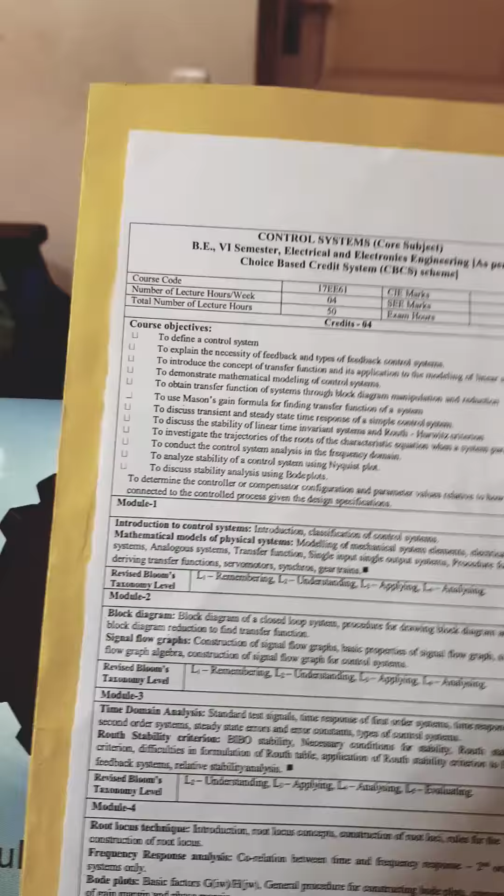Today we are going to start the third module. So module 3, the time domain analysis. Under that we are going to see standard test signals, time response, time response of first order system, time response of second order system, steady state errors and error constants, types of control systems.

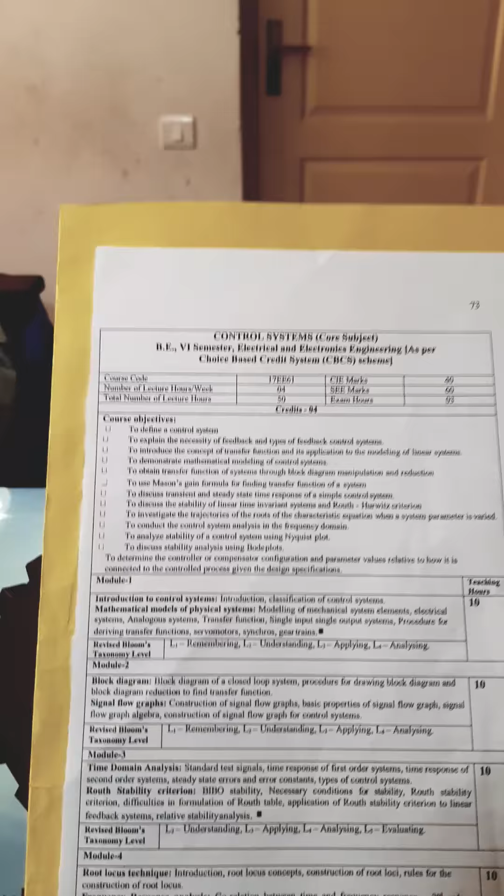So this much portion we are going to study today, and this is not as easy as what we studied before. This is a little difficult. So for all of you, a little concentration is required. A little mathematical ability is required here, and you should know the Laplace transform. That is the basic requirement of module 3. Today we will try to complete the time domain analysis.

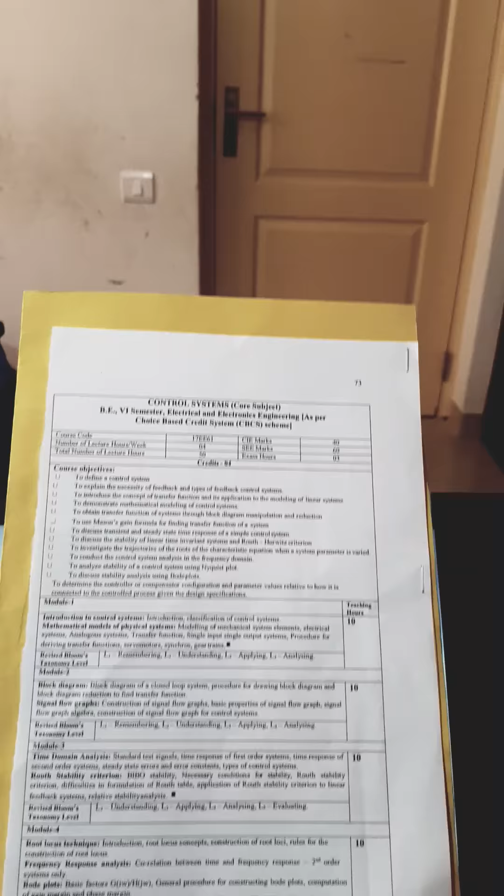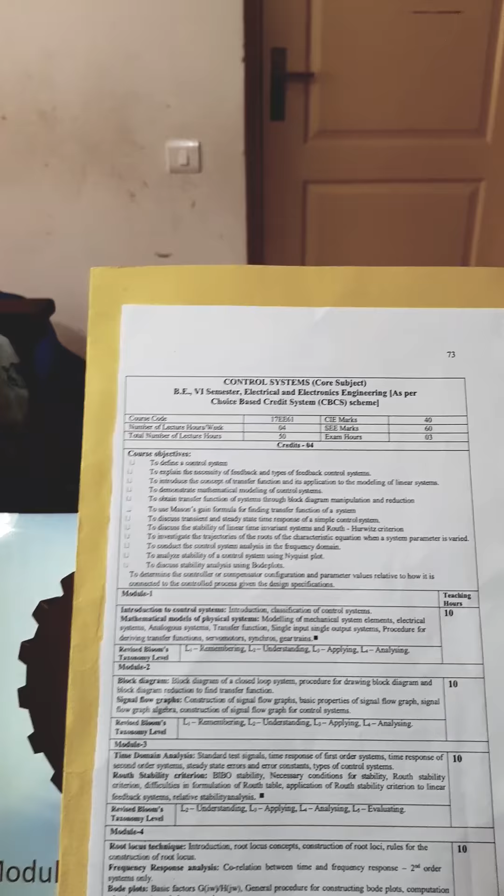So now, compared to the previous, we are going to study little difficult portions. That is the control system module 3. In that, time domain analysis we are going to do. Now the time response.

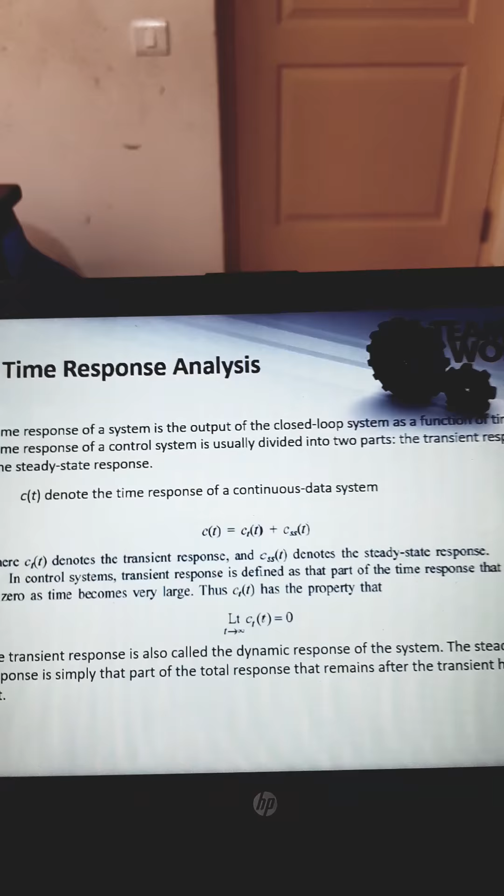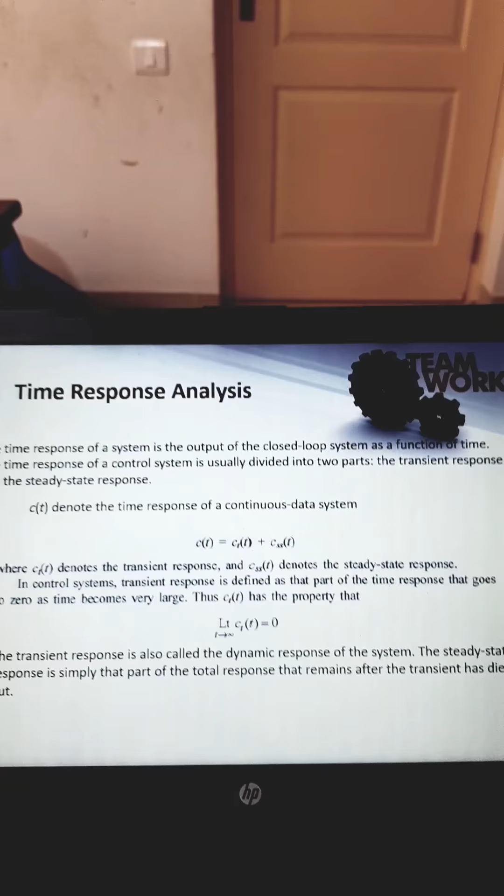So here, what is the definition of the time response? The time response of a system is the output of closed loop system as a function of time. So time response of the control system is usually divided into two parts: the transient response and the steady state response. Time response of the system is the output of closed loop system as a function of time. Usually C of t denotes the time response of the continuous data system.

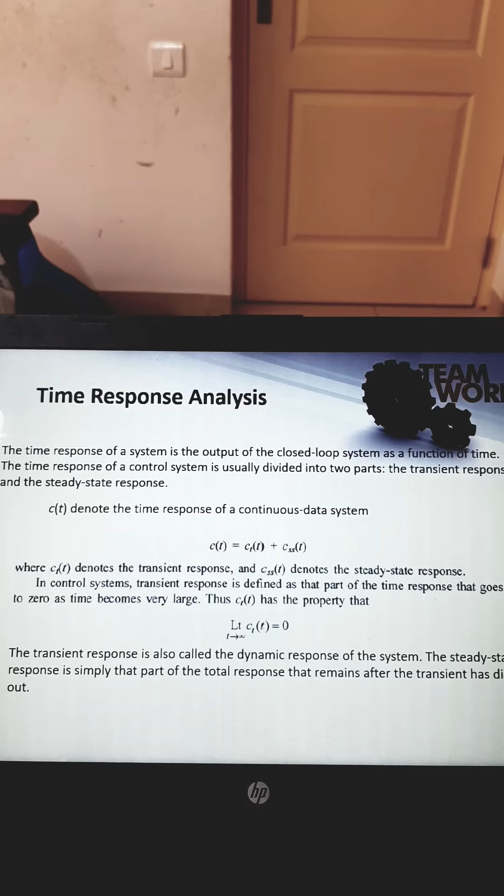C of t is equal to C_t(t) plus C_ss(t), where C suffix t, inside the bracket t, denotes the transient response, and C_ss(t) denotes the steady state response. In control system, the transient response is defined as that part of the time response that goes to zero as time becomes very large.

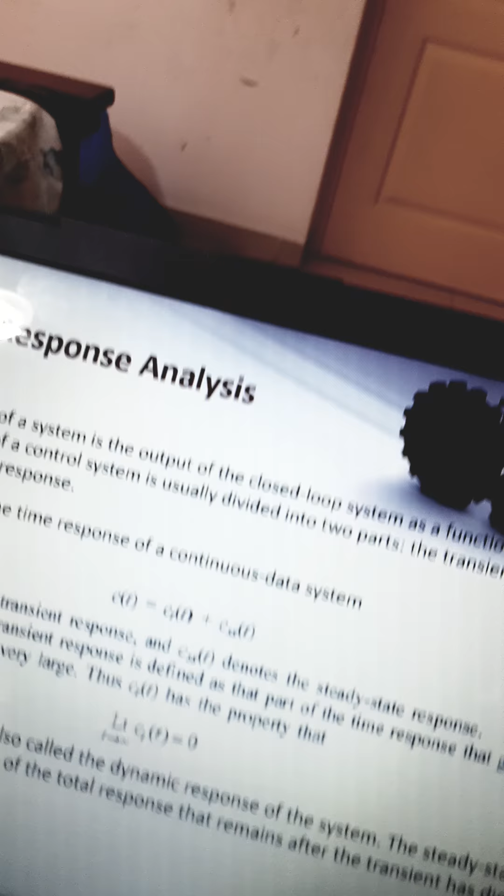Now, thus C_t(t) has the property that limit t tending to infinity of C_t(t) is equal to 0. So just wait for 1 or 2 seconds. Yes.

Now, what is transient response? Transient response is called the dynamic response of the system. Transient response is also called dynamic response of the system. Then what is steady state? Steady state response is simply that part of the total response that remains after the transient has died out. After transient died out, the response that remains is known as steady state response.

Now we will see different standard test signals. So we'll see some of the standard test signals. So the first one is step signals. The step is a signal whose value changes from one level to another level A in 0 time. One level, that is usually 0, to another level, that is A, in 0 time.

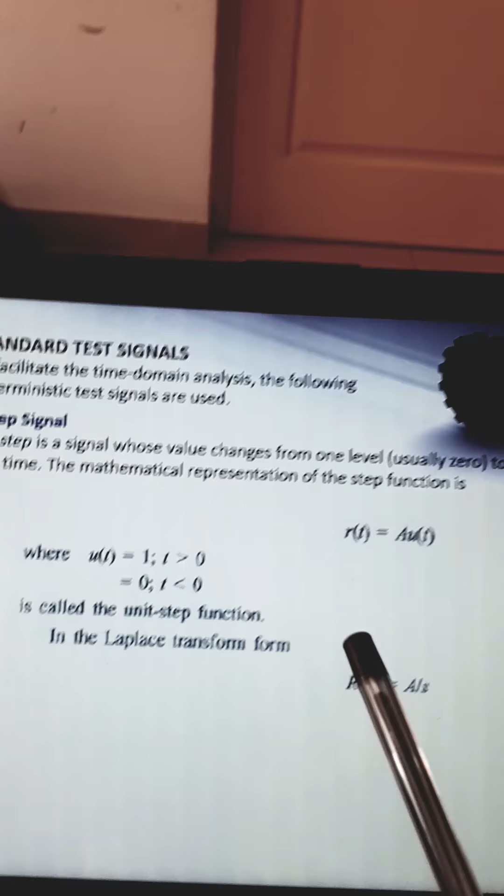The mathematical representation of the step function is R of t is equal to A into U of t, where U of t is equal to 1 for t greater than 0 and equal to 0 for t less than 0. U of t is known as the unit step function. Now when you take the Laplace transform, this becomes R of s is equal to A by s. U of t is represented by 1 by s.

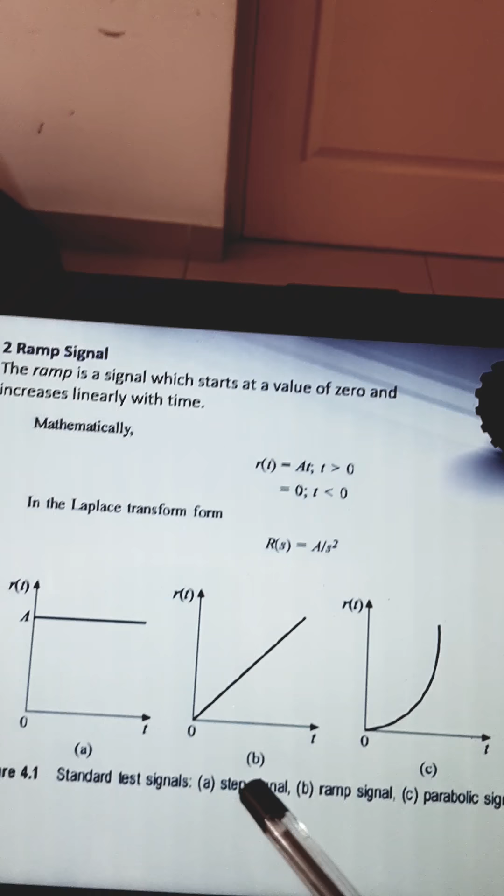Now the second one is the ramp signal. The ramp is a signal which starts at a value of 0 and increases linearly with time, like this. This will be the step. Step means before 0 it is 0, at 0 it becomes A, like that. So the ramp signal is nothing but the signal which starts at a value of 0 and increases linearly with time. So this is the ramp signal.

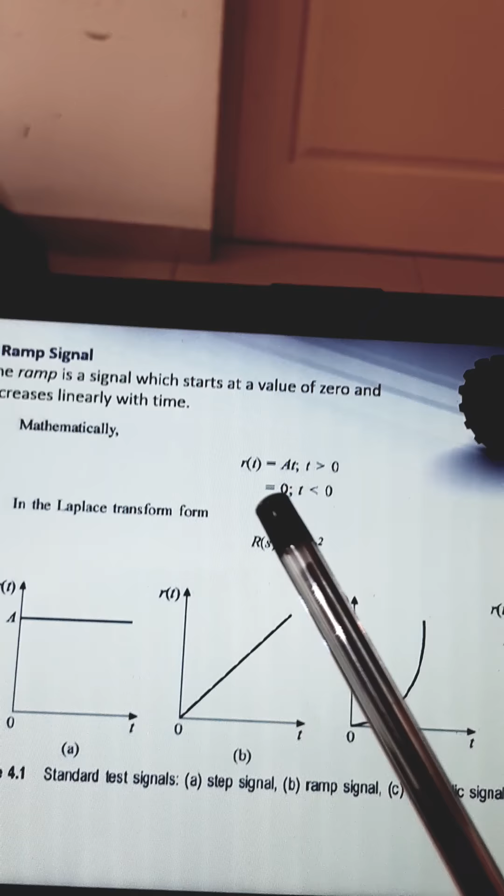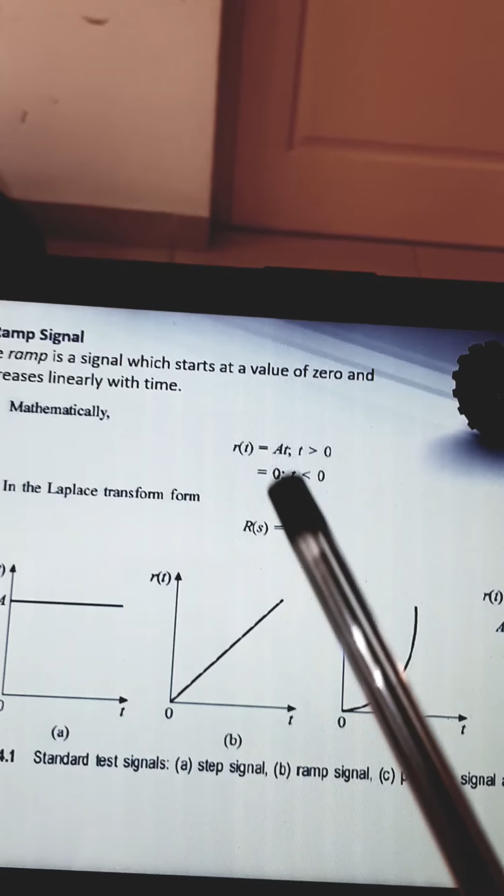Now how can we mathematically represent this? r(t) = At for t greater than 0, and equal to 0 for t less than 0. So when you are taking the Laplace transform, R(s) = A/s². So you should understand: At means A/s². So this is the ramp signal.

Third signal, we are going to study the parabolic signal. The parabolic function represents a signal that is one order faster than the ramp function. The mathematical representation of the signal is r(t) = At²/2 for t greater than 0, and equal to 0 for t less than 0. In the Laplace transform form, you will get R(s) = A/s³. This is the parabolic signal.

Now, impulse signal. What is an impulse signal? A unit impulse is defined as a signal which has a zero value everywhere except at t = 0, where its magnitude is infinite. It is generally called the delta function and has the following property.

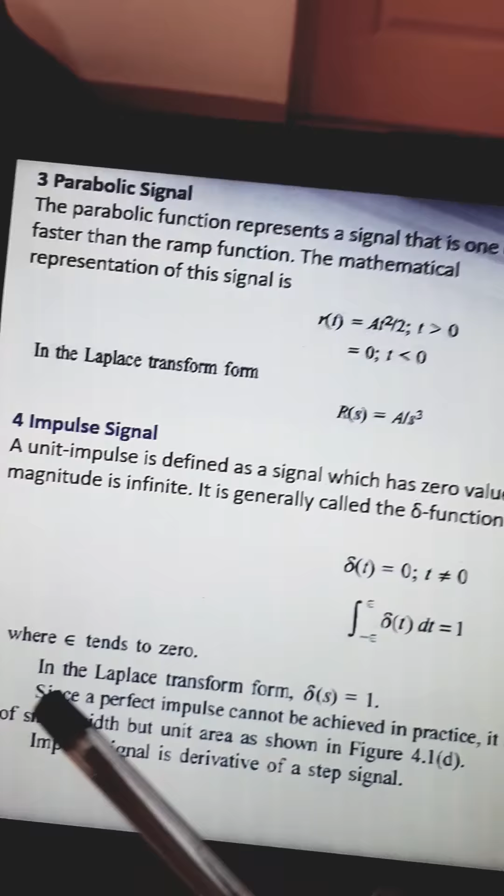δ(t) = 0 for t not equal to 0, and the integration from minus epsilon to epsilon of δ(t) dt is equal to 1, where epsilon tends to 0. So in the Laplace transform, δ(s) = 1.

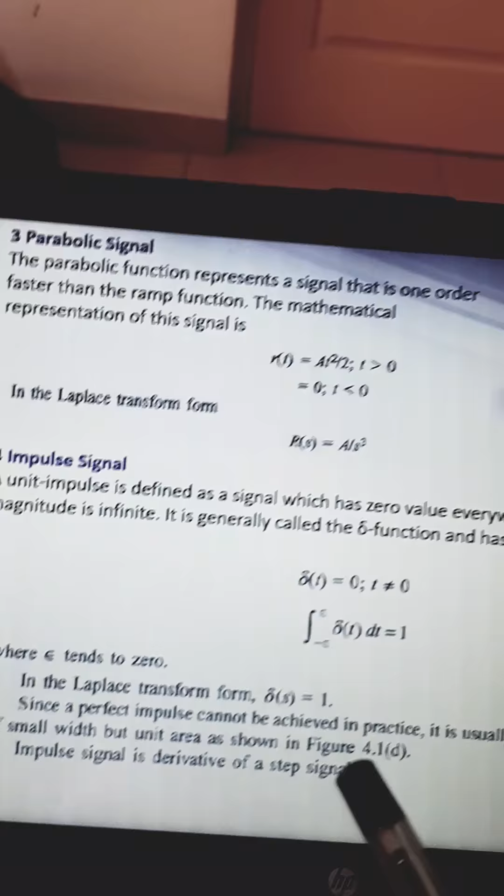Since a perfect impulse cannot be achieved in practice, it is usually approximated by a pulse of small width but unit area, as shown in figure 4.1(d). So the Laplace transform δ(s) = 1, and the integration from minus epsilon to plus epsilon of δ(t) dt is equal to 1.

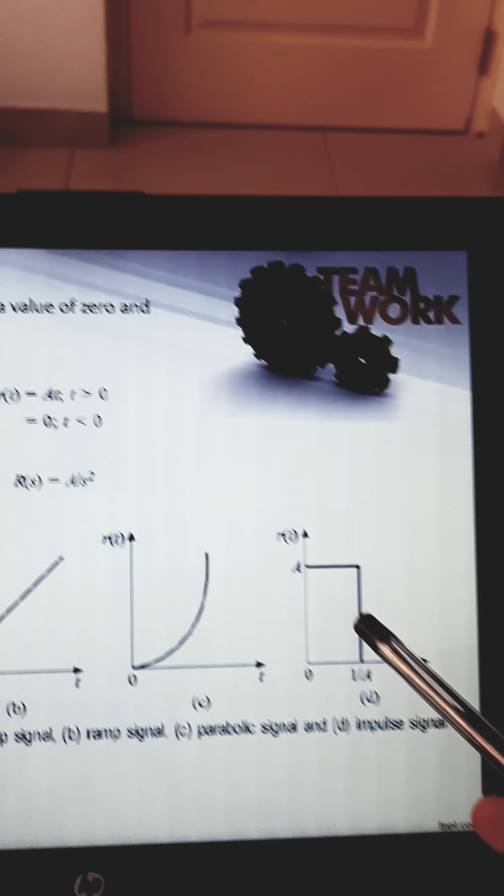So you cannot show an infinite representation at 0. So it is usually represented like this, the impulse signal. It has unit area: A into 1/A, if you multiply, you get 1. And another important thing is the impulse signal is the derivative of the step signal. These are things you are already aware of.

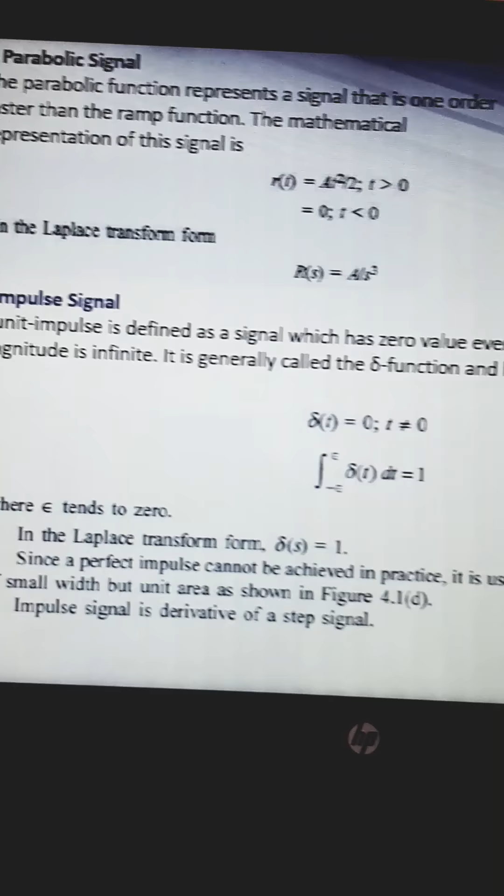So, the impulse response of a system with transfer function C(s)/R(s) = G(s) is given by C(s) = G(s)R(s), and R(s) is 1, so it becomes G(s). So c(t) is the inverse Laplace transform of G(s), that is g(t). Thus the impulse response of a system, indicated by g(t), is the inverse Laplace transform of its transfer function. G(s) is the transfer function.

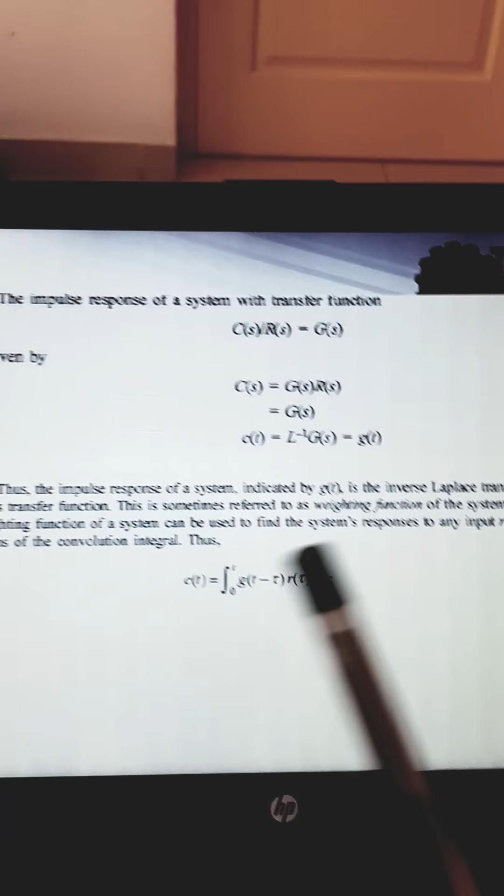So from this example, you can see that C(s) = G(s). The impulse response of a system, indicated by g(t), is the inverse Laplace transform of its transfer function. This is sometimes referred to as the weighting function of the system. The weighting function can be used to find the system response to any input r(t) by means of the convolution integral. Thus, c(t) is the integration from 0 to t of g(t − τ) r(τ) dτ. This is a very important thing.

The weighting function of a system can be used to find the system response to any input r(t) by means of the convolution integral, that is, c(t) is the integration from 0 to t of g(t − τ) r(τ) dτ.

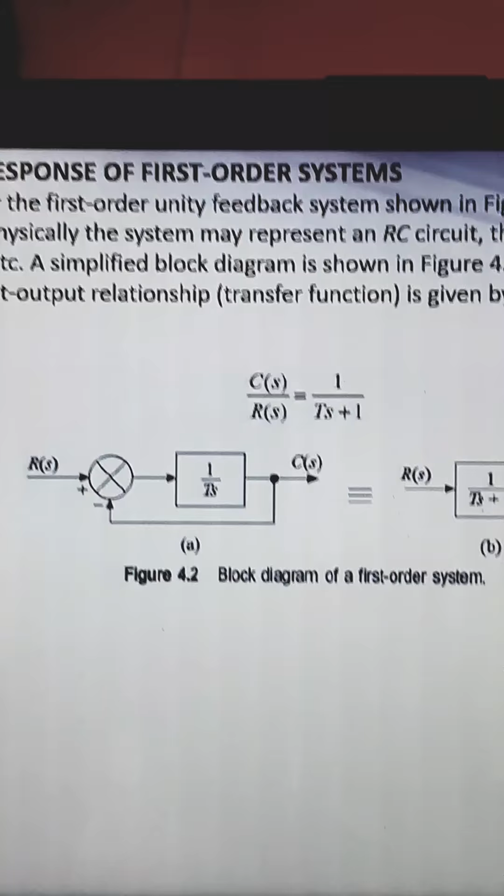Now next we will see the time response of the first order system. First we will see the time response of first order system.

Consider a first order unity feedback system as shown in figure. It's a first order unity feedback. There is no feedback amplification, it is having unity feedback shown in figure. Physically and practically the system may be represented by an RC circuit or thermal system, etc.

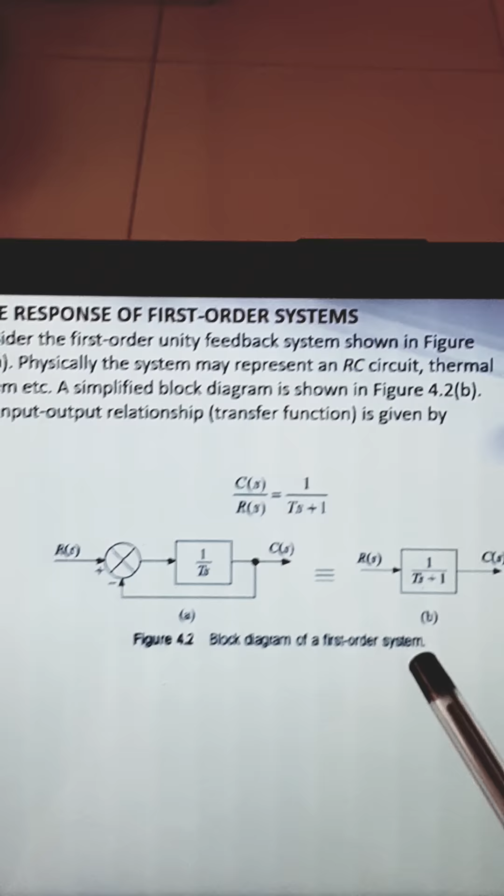A simplified block diagram is shown in figure 4.2b. This is a simplified block diagram. The input output relationship transfer function is given by C of s divided by R of s is equal to 1 by Ts plus 1. 1 minute.

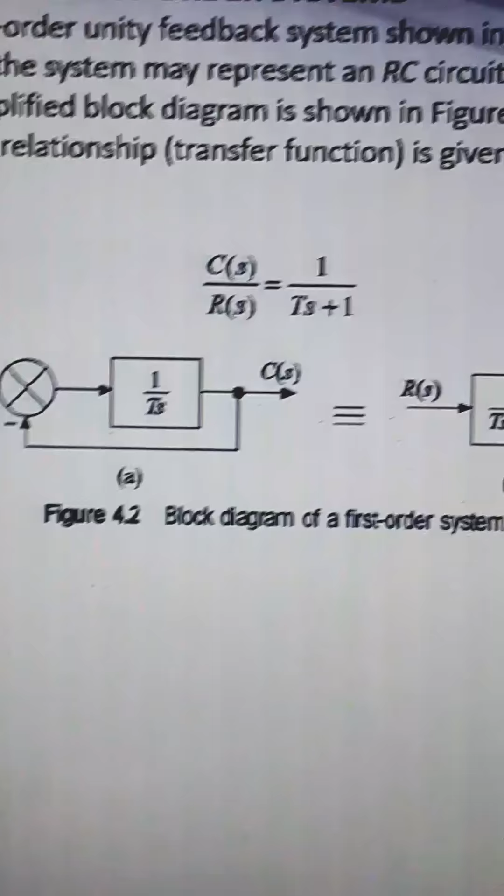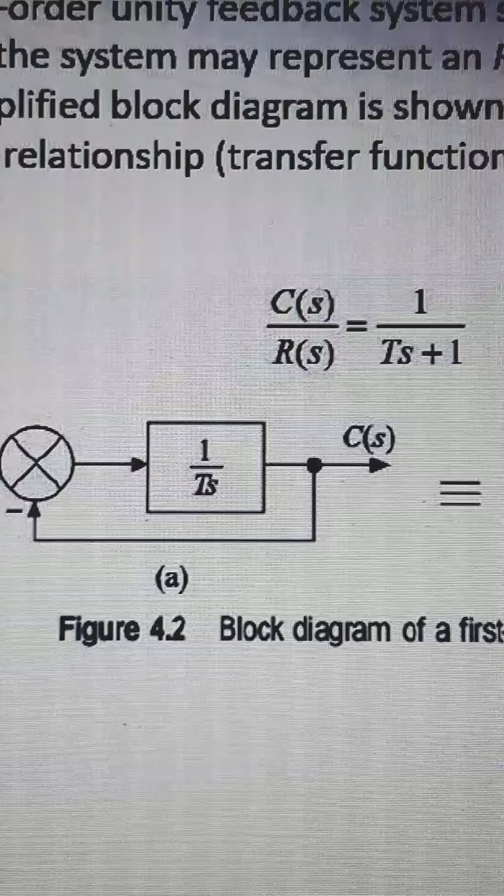So here we are getting this C of s divided by R of s. Using the same functions, you are getting a feedback like this. Here H is equal to 1. So when H is equal to 1, you are getting it as C of s divided by R of s.

C of s divided by R of s: G is here in this circuit. G is 1 by Ts, and the feedback sign is minus, you can see the feedback sign is minus, so it becomes 1 by Ts divided by 1 plus G H. G is 1 by Ts, H is equal to 1. So this is equal to 1 by Ts divided by

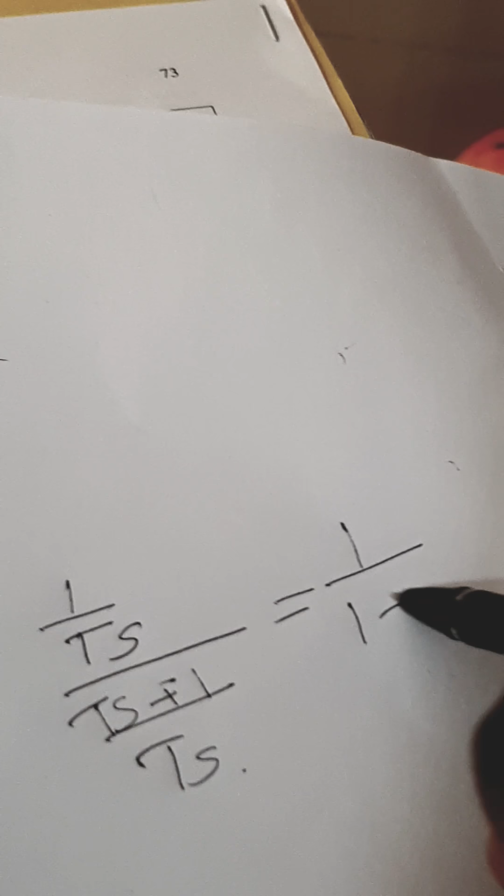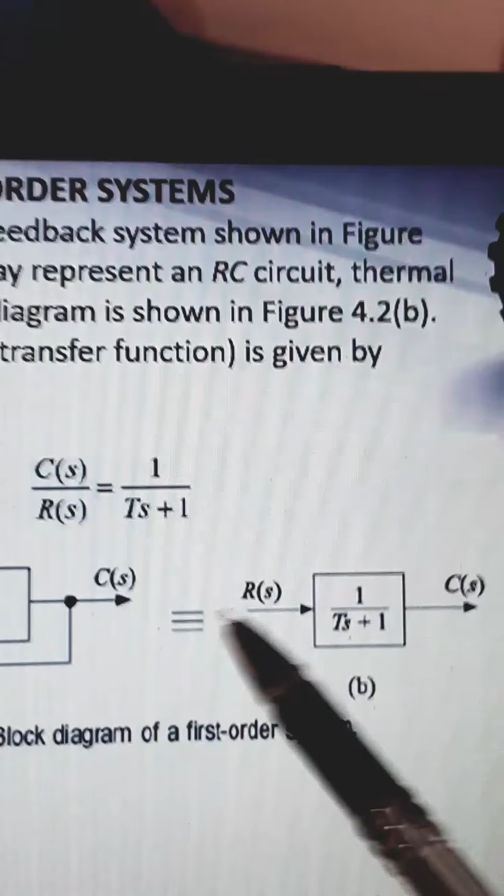Ts plus 1 over Ts. So Ts is cancelled, it will become 1 by 1 plus Ts. That is why you are getting C of s by R of s is equal to 1 divided by Ts plus 1. So here with R of s and C of s, it is simplified as one simple block with 1 divided by Ts plus 1.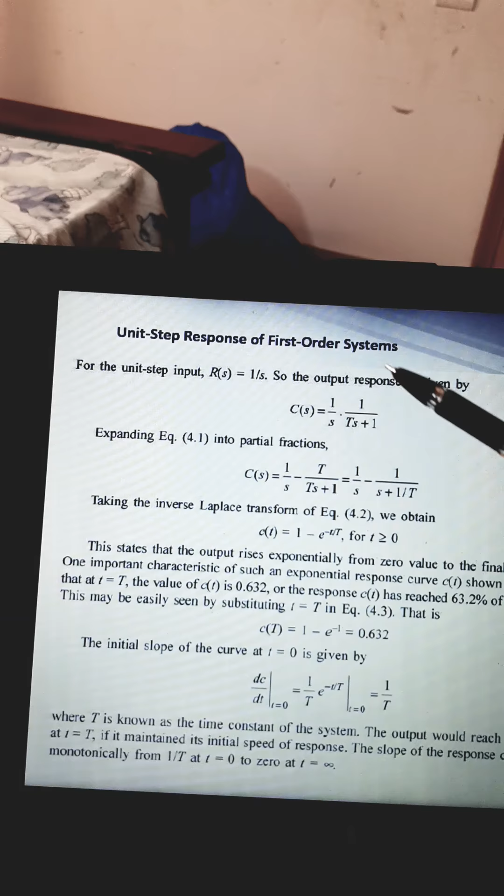Now, for a first order system, if you are applying a unit step to the input, what is its response? For a unit step input, R of s is equal to 1 by s. So the output response of the system is given by C of s.

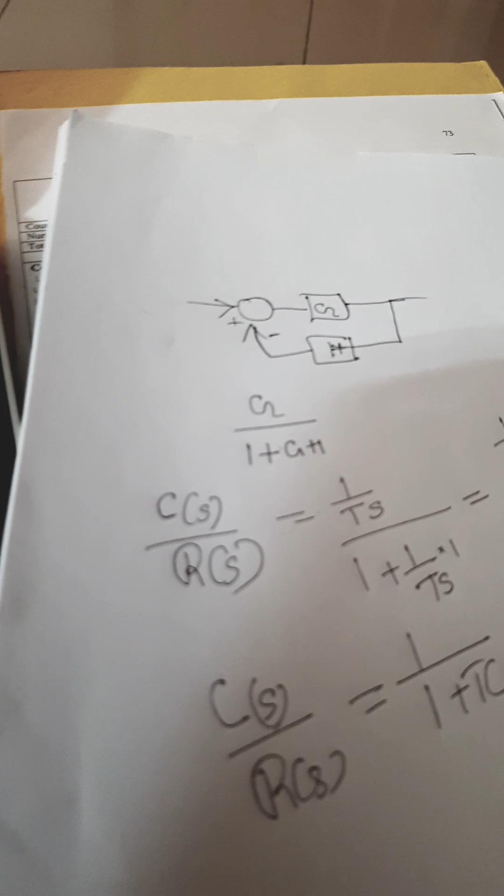You know that C of s divided by R of s is equal to 1 by 1 plus Ts. Then C of s is equal to 1 divided by 1 plus Ts into R of s. So here the input signal R of s is 1 by s, so C of s is equal to 1 by s into 1 divided by Ts plus 1.

Now this expression, if you are rearranging or mathematically manipulating it, can be written as C of s is equal to 1 by s minus T by Ts plus 1. If you are taking the common term, you will get the same equation, because the denominator will become s into Ts plus 1, numerator becomes Ts plus 1 minus Ts. Ts will cancel, so it will become the same expression. That is why this expression is modified into this form.

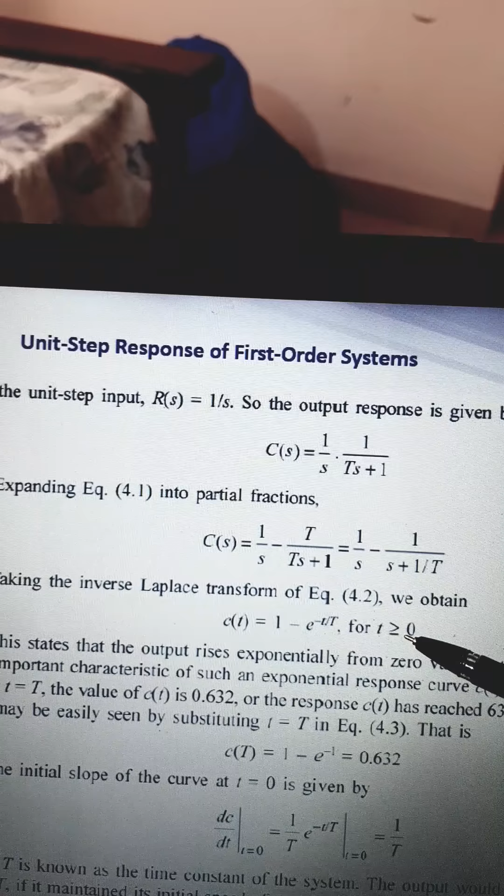This can be again written as 1 by s minus 1 divided by s plus 1 by T. Now, when you are taking the inverse Laplace transform of equation 4.2, we are getting c of t equal to 1 minus e to the power of minus t by T, for t greater than or equal to 0. This states that the output rises exponentially from 0 value to a final value of unity.

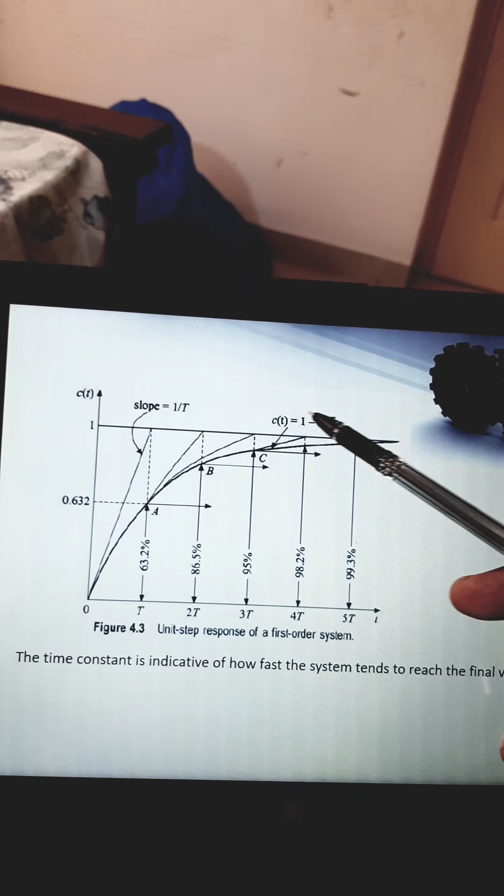One important characteristic of the exponential response curve is shown in figure 4.3. This is the important characteristic: C of t is equal to 1 minus e to the power of minus t by T. This important characteristic shows that the slope, when observed, is 1 by T.

The slope is 1 by T, and you can see how the curve looks. This is a unit step response of a first order system. They are representing different points A, B, C, where at the starting the slope is 1 by T. At A what is the slope, at B what is the slope, and at C what is the slope - that is all represented by the lines.

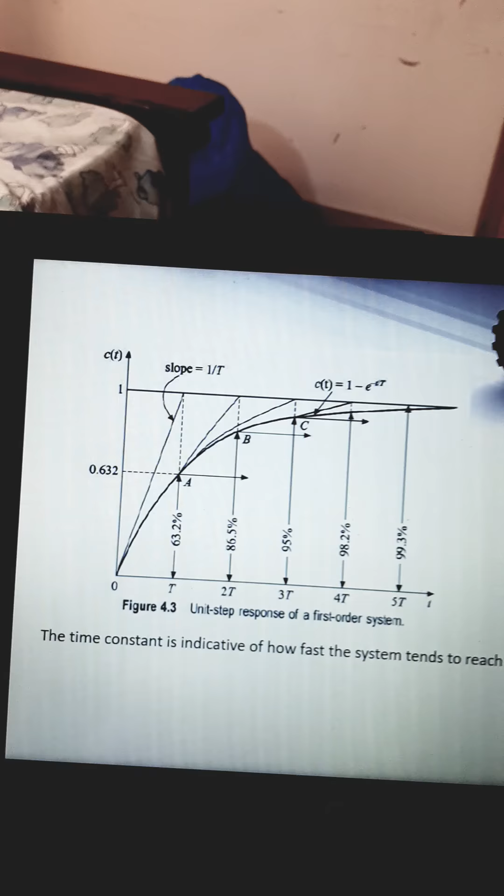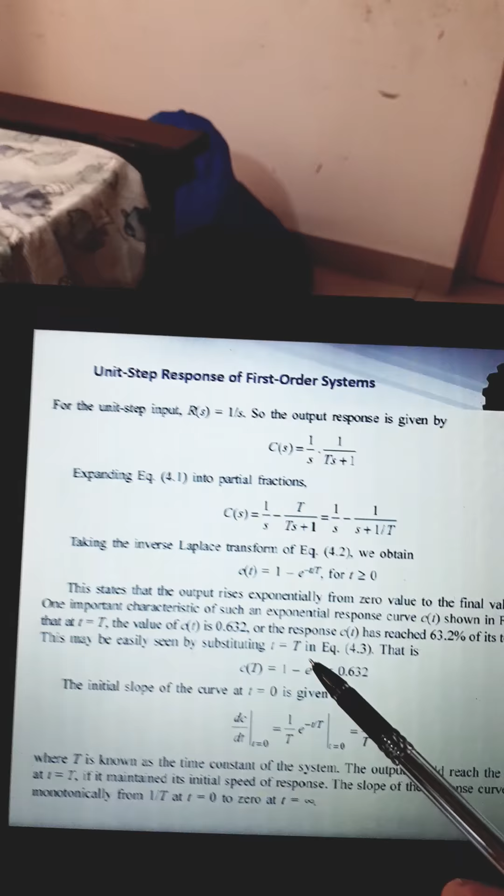Now, the characteristics of the exponential curve C of t shown in figure 4.3 is that at t equal to T, the value of C of t is 0.632, or the response C of t reaches 63.2% of its initial total change. This may easily be seen by substituting t by t equal to capital T in equation 4.3.

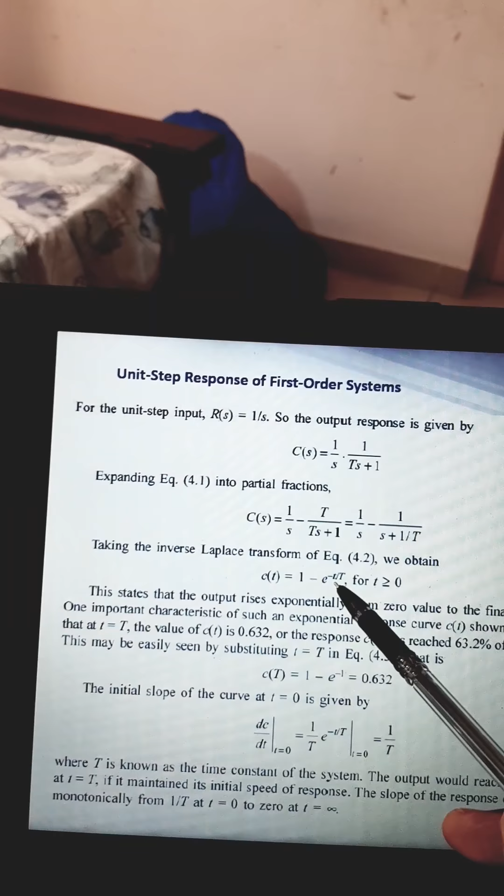C of t is equal to 1 minus e to the power of minus t by T, where if you substitute small t with capital T, we get C of t is equal to 1 minus e to the power of minus 1, that is equal to 0.632. So you can see 0.632 at t equal to T - we are getting the magnitude as 0.632.

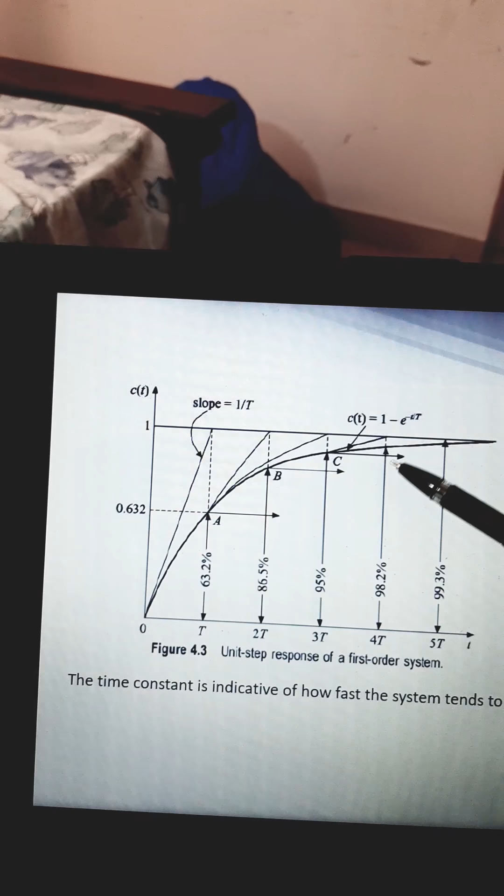At 2T, what is the value that you are getting? At 3T, 95 percentage. At 4T, 98 percentage. At 5T, you are getting 99 percentage, like that. So if you substitute in the previous example, you can see how this exponential increase is happening.

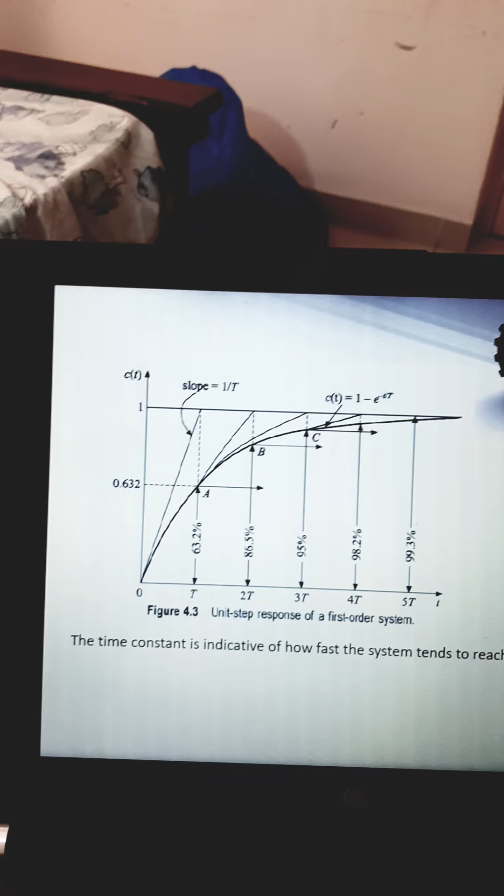Now the initial slope of the curve at t equal to 0 is given by dc by dt at t equal to 0, which is 1 by T times e to the power of minus t by capital T, at t equal to 0 that is equal to 1 by T. So the initial slope is 1 by T, at t equal to 0, and each time the slope changes.

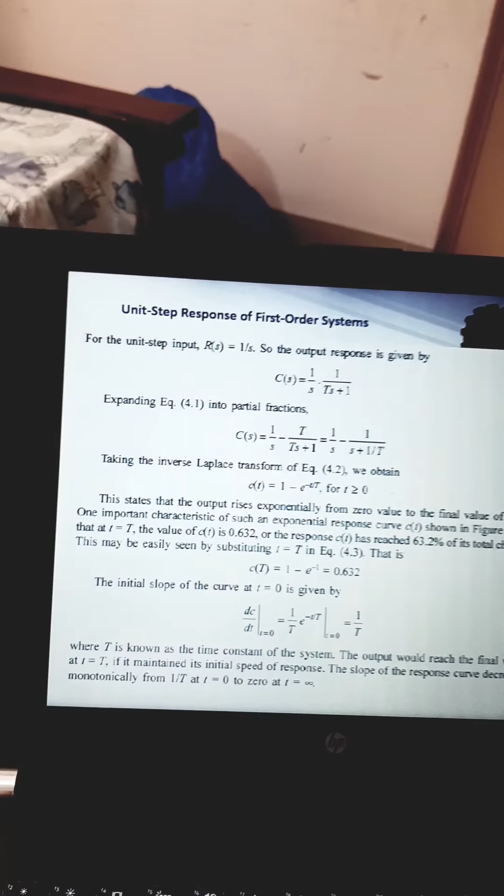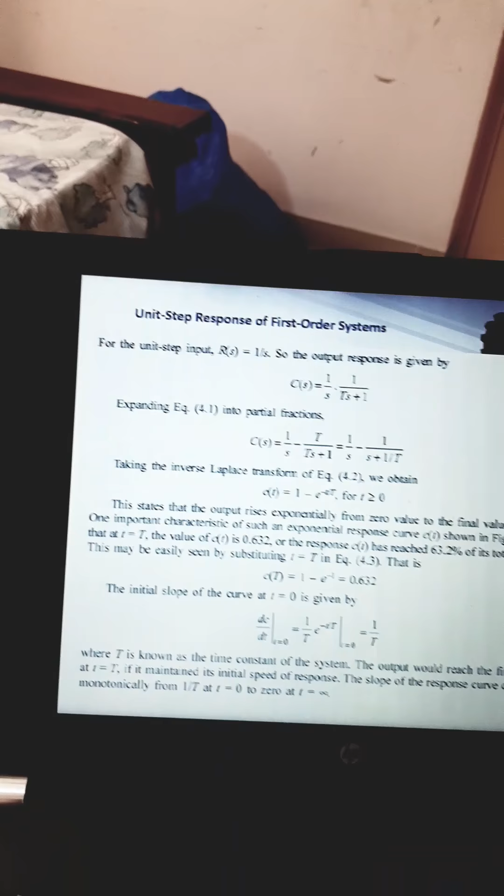Now T is known as the time constant of the system. The output would reach the final value at t equal to capital T if it maintained its initial speed of response. The slope of the response curve decreases monotonically from 1 by T at t equal to 0 to 0 at t equal to infinity. Initially the slope was 1 by T, then after that the slope decreases and becomes 0 when t becomes infinity.

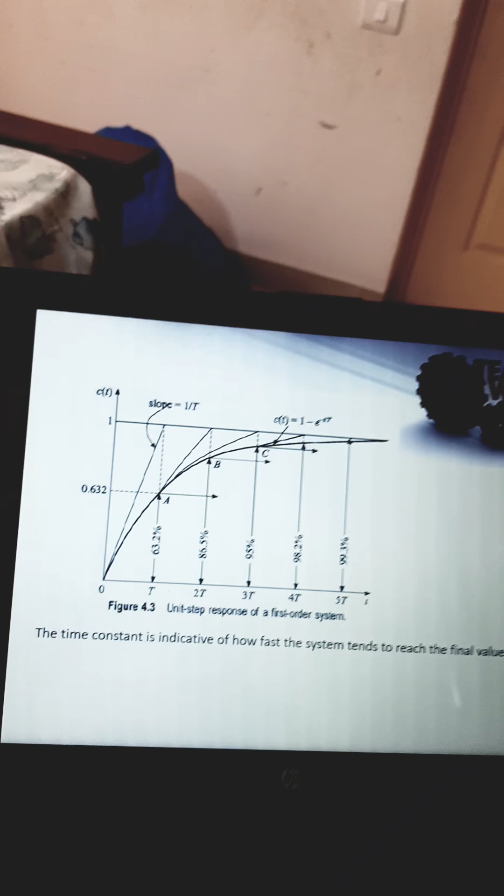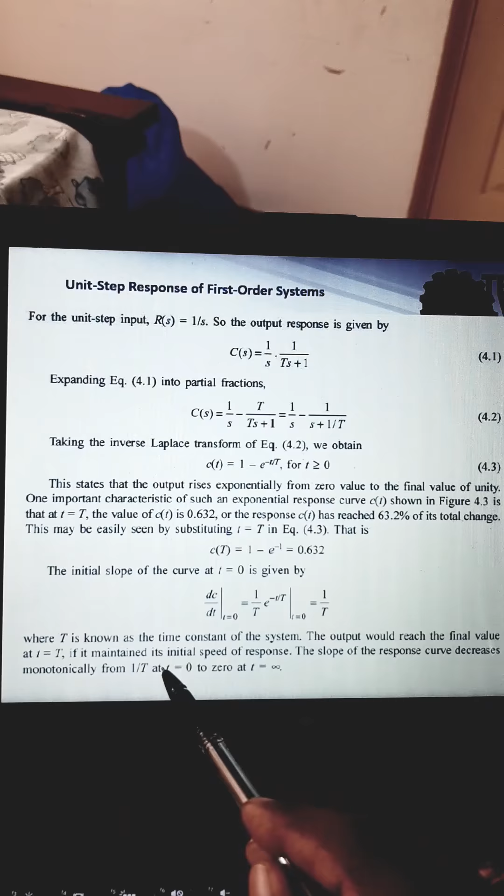So the output would reach the final value at T if it maintains its initial speed of response.

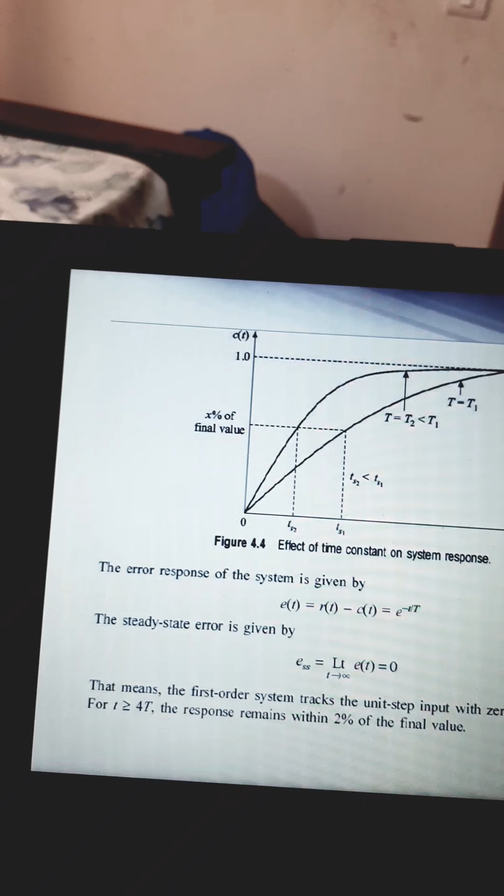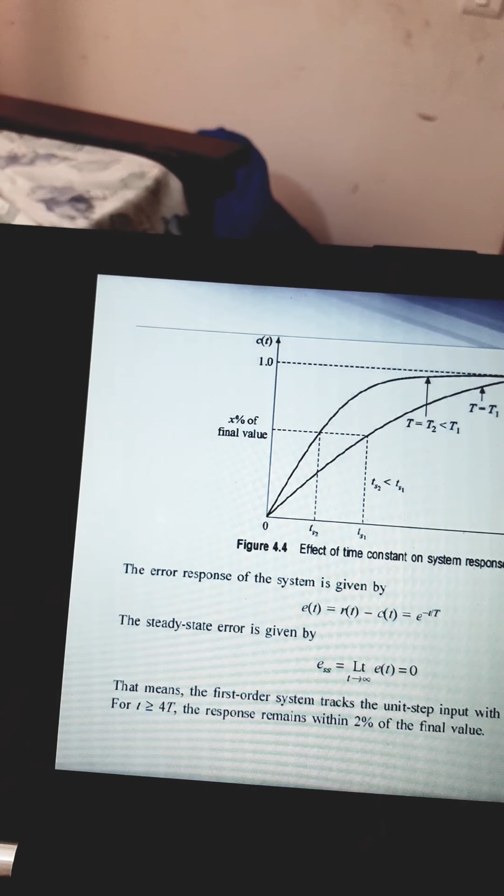Now the error response of the system is given by E of t is equal to R of t minus C of t, that is equal to e to the power of minus t by capital T. So here the error signal is obtained.

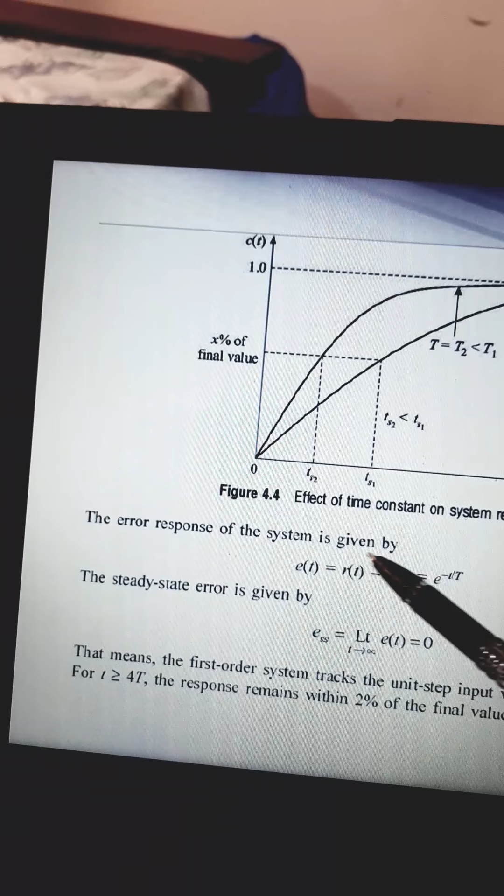You have C of t, and your input R of t. Now in order to find the error, the error signal can be obtained by R of t minus C of t, that is input signal minus output signal, then you are getting the error signal.

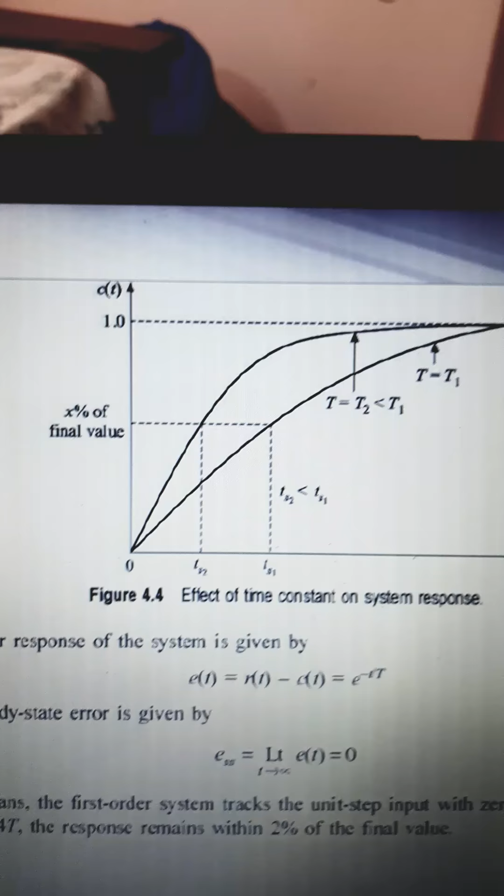That is equal to 1 minus 1 minus e to the power of minus t by capital T, which is equal to e to the power of minus t by capital T. So the steady state error is given by Ess equal to limit t tending to infinity of E of t, that is equal to 0. The steady state error is given.

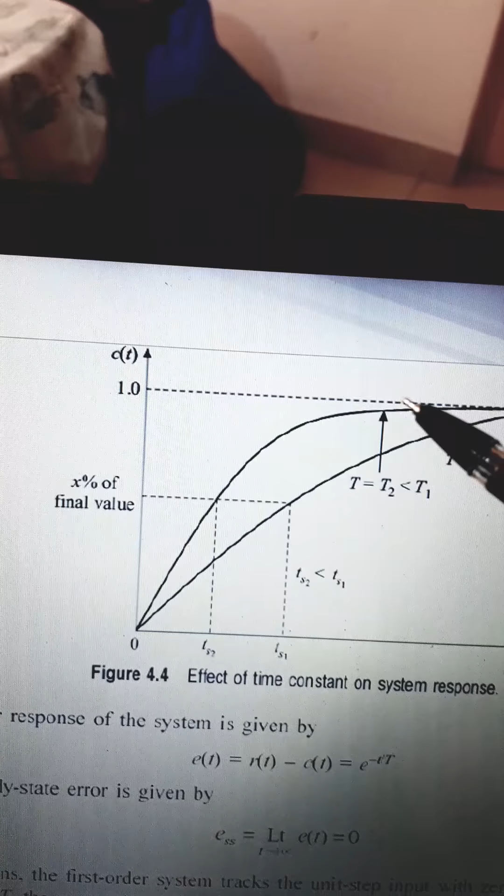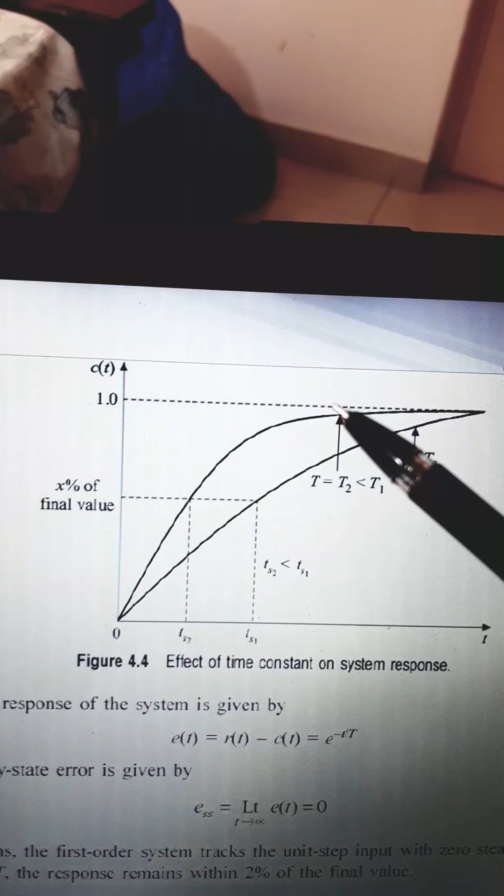Now let's see the effect of time constant. Here, this is t equal to T1, and t equal to T2, which is less than T1. This curve has a time constant T1, and this one has a time constant T2, where T2 is less than T1. So you can see in the time response how this one is very fast, while the other will take some more time to reach its final value.

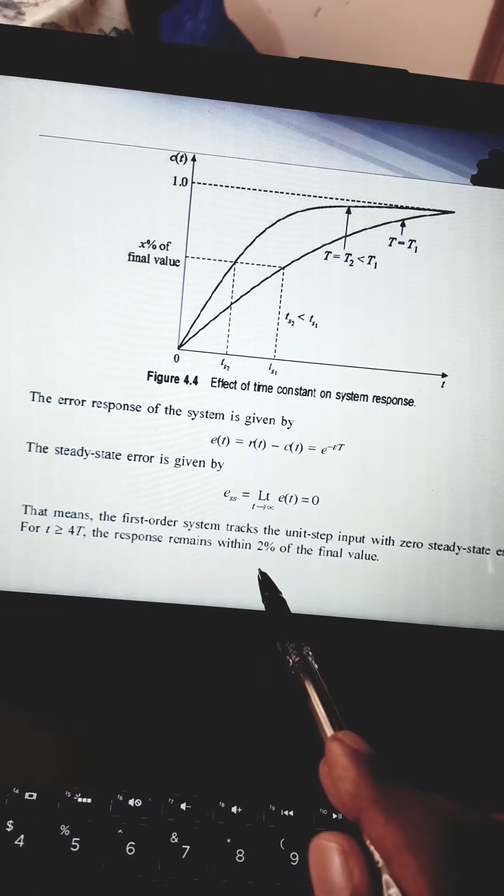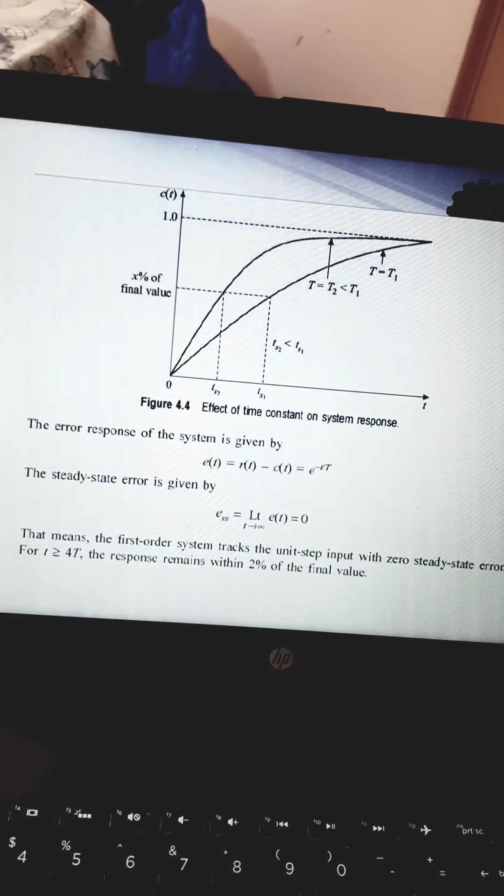So now, here the first order system tracks the unit step input with zero steady state error for t greater than or equal to 4 tau. This response remains within 2% of its final value. This means the first order system tracks the unit step input with zero steady state error, which we calculate for t greater than or equal to 4 tau. The response remains within 2% of its final value.

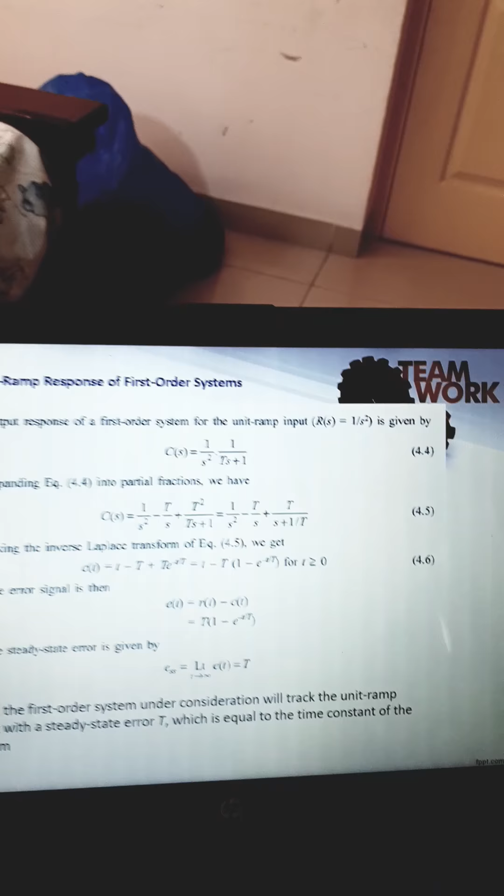Next you will see the unit ramp response of the first order system. The output response of the first order system for unit ramp input, where R of s is equal to 1 by s square, is given by C of s is equal to R of s into G of s, so you are getting it as 1 by s square into 1 by (ts plus 1).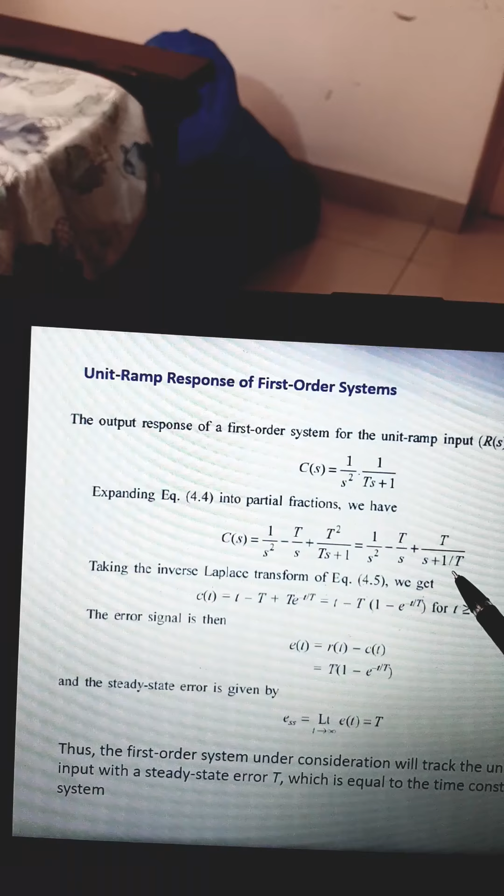Now this expression, we are rearranging in such a way that the complete answer equals this. So we are getting C of s equal to 1 by s square minus t by s plus t square by (ts plus 1). When you take the common term and substitute, you get this value. Here the common term is s square into (ts plus 1). Dividing the numerator and denominator by t, you get t divided by (s plus 1 by t).

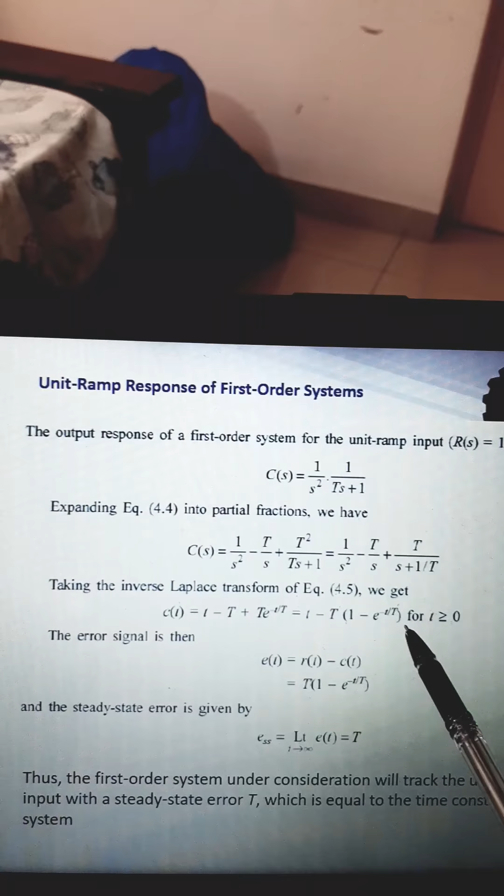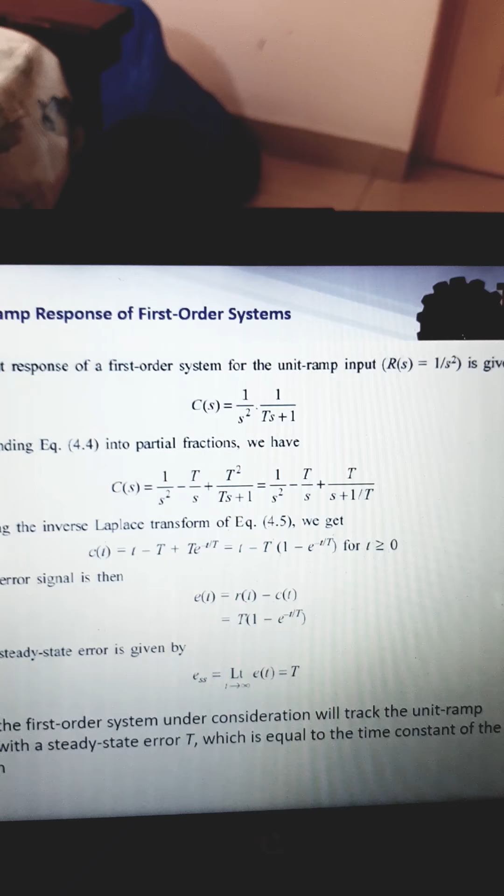Now taking the inverse Laplace transform on this equation, we get C of t is equal to t minus tau plus tau into e to the power of minus t by tau, for t greater than or equal to 0. Now the error signal is E of t equals R of t minus C of t, which gives us tau into (1 minus e to the power of minus t by tau), and the steady state error is given by E_ss, that is limit t tending to infinity, which becomes tau. Thus the first order system under consideration will track the unit ramp input with a steady state error tau, which is equal to the time constant of the system.

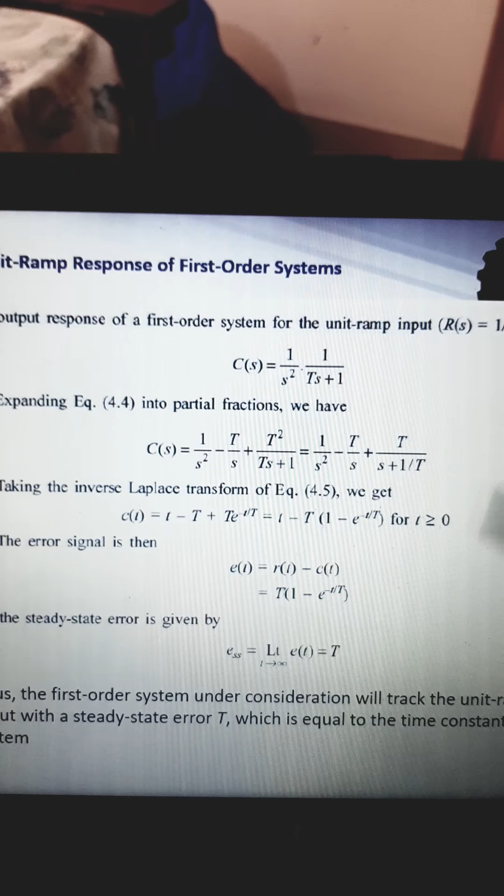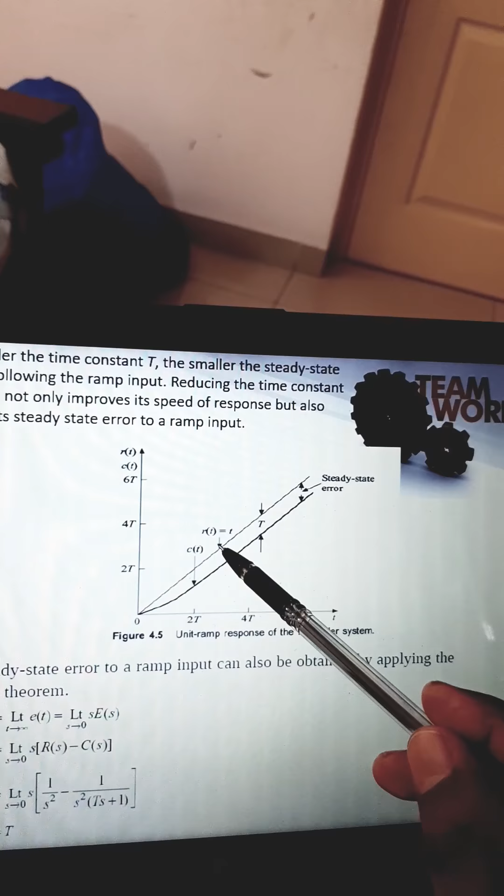So the same method we use for each test signal. First we applied a unit step input, then here we are finding the response with a unit ramp signal. Now the smaller the time constant, the smaller the steady state error in following the ramp input. Reducing the time constant therefore not only improves the speed of response but also reduces its steady state error. So here you can see C of t is this, R of t is the input, and the output. The steady state error you can see here is tau.

The steady state error to ramp input can also be obtained by applying the final value theorem: E_ss equals limit t tending to infinity E of t, that is equal to limit s tending to 0 of s into E(s). This is the final value theorem. So limit s tending to 0 of s into E(s) means R(s) minus C(s). R(s) is 1 by s square, C(s) is 1 by s square into (ts plus 1). If you do this, you also get the steady state error as tau by using the final value theorem.